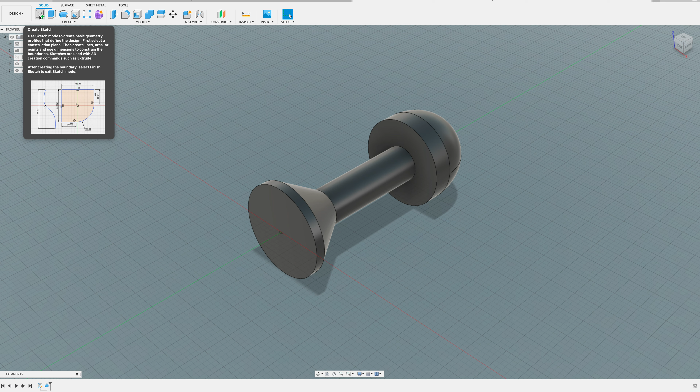To do that, we're going to draw a sketch on the back and cut up through after we've drawn the sketch. So the first thing we do is click Create a Sketch, and I want to make sure I pick the circle surface. Sometimes it's easy to accidentally click one of the yellow default surfaces, so make sure you're on the bottom of the projectile. It automatically turns it so I'm looking straight down on it.

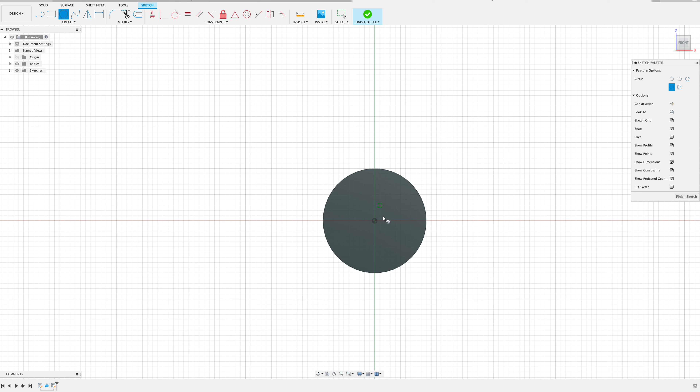The next thing I want to do is draw a circle, starting right in the center. You'll notice a little green circle pops up to show you that you're on the center - it's a snap feature.

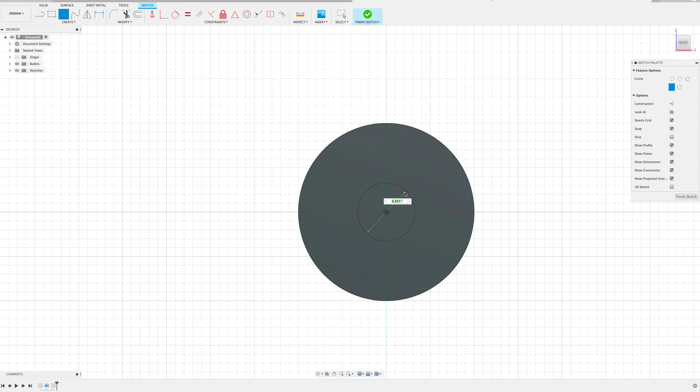Make sure that pops up, and I'll click, then as I come out here you'll notice I'm trying to get a little thing to show up. Usually I get a reference that points out the size of the shaft of the circle, but I'm not seeing it - it usually turns blue. Oops, clicked on accident. It doesn't seem to be finding it, so for this tutorial we're just going to pick a size. Just keep in mind we're trying to get about the size of the shaft of that circle. So I'm going to just click about right here.

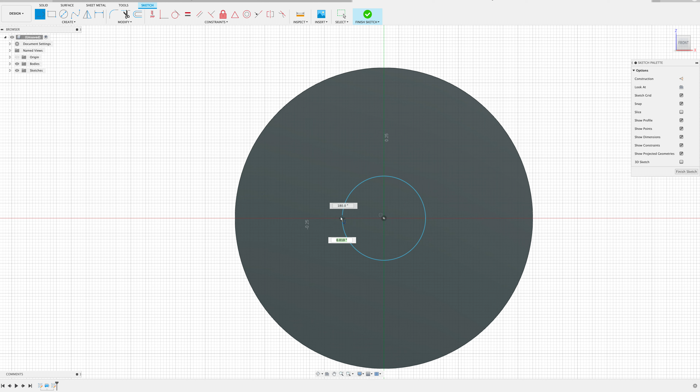Once you've drawn that circle, we're going to use the line command to create the fins for our projectile. I clicked on line, and now I'm clicking this point called a quadrant - the very left side of the circle before it starts getting smaller again, and it'll snap to it. Then I go to the point of the circle, and do the same thing again from that point back down to the other side quadrant. Now that we have this fin drawn, it's time to do what's called an array, or a revolve with a 2D sketch.

So this is the new part. Over here I'm going to click the little Create tab underneath all these options - there's a chance yours might be up here, that's okay. Down here we have a circular pattern. I'm going to click on it.

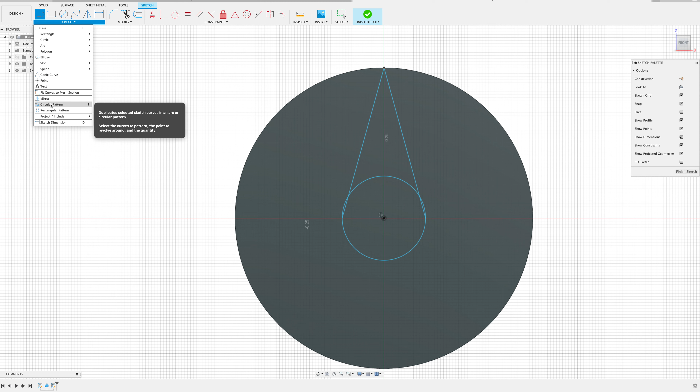The first thing it wants to know is what objects I want to circle, so I'm going to select this line and this line - I have both lines selected, and you can see the color changes to help with that. Then you select the center point - I clicked on that button and it turned blue, and the center point is the center of the circle. So I'll click there.

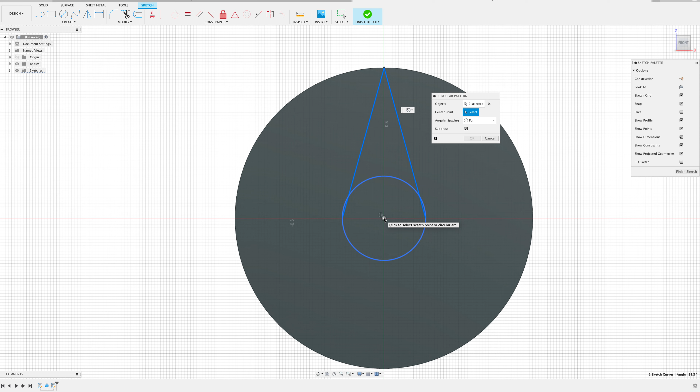You can see it automatically starts with the number 3, but I can change that number to however many I'm interested in drawing. I'll do 5 for now, and you can do as many as you want - this is where you choose. Then as soon as I'm done with what I see, I just hit OK.

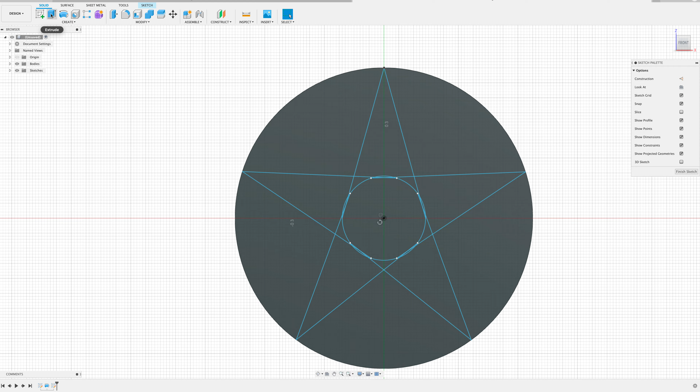Now the last thing we'll do is extrude this part up through so that it makes the fin. We want to keep the star and cut away these side pieces. So I'm going to click on my solid and hit extrude. Again, you could have exited the sketch first and then clicked extrude, but I just took that quick shortcut to show you.

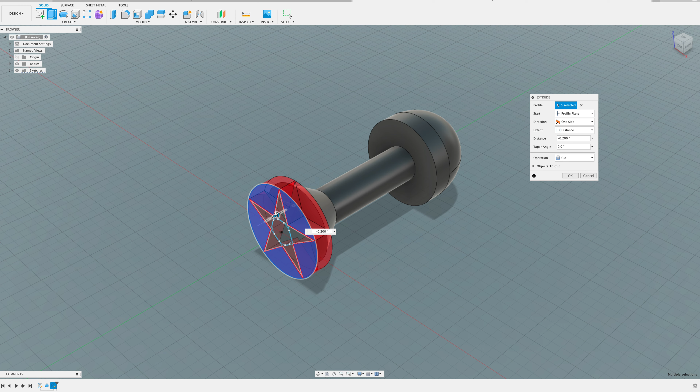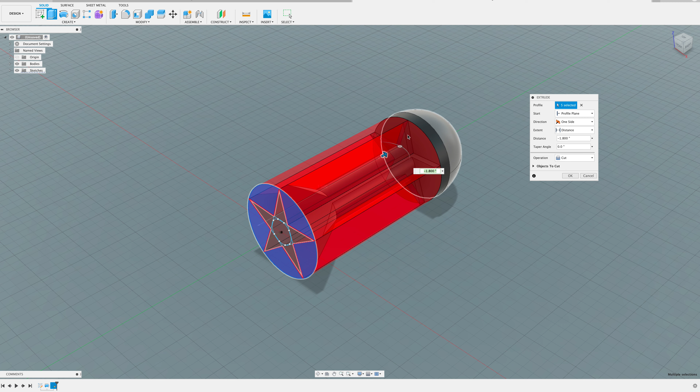So click the surfaces that are not the star, and then I prefer to grab this little blue arrow and pull it up. To make a nice design I'm just going to cut up - you can see I could go too far, we don't want that, and I could have stopped down here, but I want it to do a star up into the base just for design. You can see how that makes kind of a little star cut into the bottom of the head of the projectile. Then if I like what I see, I'm going to say OK.

And there is our projectile with fins. So that is the end of part 2.

Consider this as you're thinking about how you're going to do your final design.